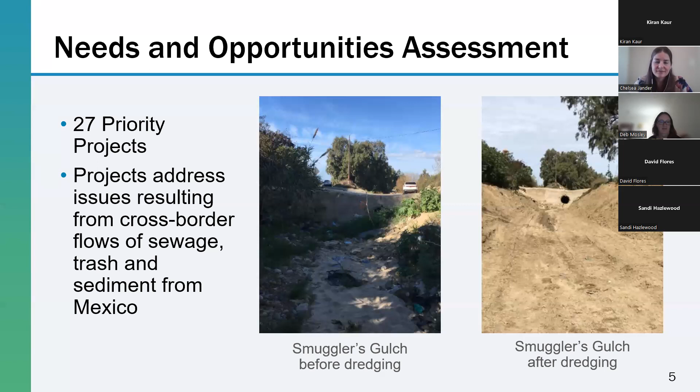Through that outreach, we identified 27 priority projects with a goal of accomplishing as many of the projects as possible in the future. Two of the projects we identified in the study, projects 10 and 11, have now been combined and are known as the Smuggler's Gulch Improvement Project. These projects address stormwater, sediment, and trash issues in Smuggler's Gulch through the addition of a sediment basin, replacement of an undersized culvert, and the addition of trash capture devices in the area. This project was prioritized as it was the only drainage area in the Tijuana River Valley that doesn't currently have any stormwater protection. As the supervisor mentioned, these projects are funded through a California State Coastal Conservancy grant for $10 million, which was awarded in May of 2021, and includes funding for the planning, design, permitting, and construction of the project. Next slide, please, Chelsea.

Great. Thank you so much, Kiran, for that overview. So now we're going to get into the details of the Gulch, including the existing conditions and then the project overview.

Presently, there are temporary efforts to address stormwater and sediment transport at Smuggler's Gulch, including the trash booms, which capture trash flowing through the Gulch, and dredging where sediment and non-floatable items are removed from the Gulch. Annual dredging costs vary, but are approximately $500,000 per year. These efforts are not sufficient as a long-term solution, given the high volume and velocity of stormwater flowing through the Gulch. The existing conditions also include an occasionally flooded Monument Road at the intersection of the Gulch and the road, as the vice chair had mentioned.

The goals of the project are to reduce trash and capture sediment on a much larger scale than we are currently able to do with those temporary measures. To achieve this goal, three primary project components were determined to meet those needs: a sedimentation basin, a new culvert under Monument Road, and trash capture infrastructure.

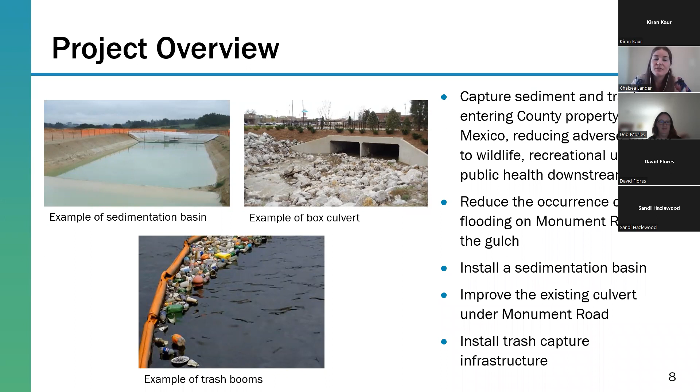The criteria includes environmental preservation, viewshed, groundwater depth, constructability, maintenance requirements, permitting, easement requirements, access, and cost. The criteria were developed to help create a balanced project that brings the greatest environmental benefits while meeting long-term operational and maintenance needs. An environmental analysis was completed in 2021, and environmental permitting is currently underway.

Locations both north and south of Monument Road were considered for the basin. The locations north of the road were deemed not feasible for several reasons. The area is within the FEMA Special Flood Hazard Area and Regulatory Floodway that prohibits encroachment. Also, the area is more susceptible to flood events that would actually wash away any captured storm sediment and trash.

Once we complete the study evaluation, we'll move on to the construction document phase with engineering and permitting of the project. We plan to complete that portion of the project spring 2023 before we move into procurement and construction.

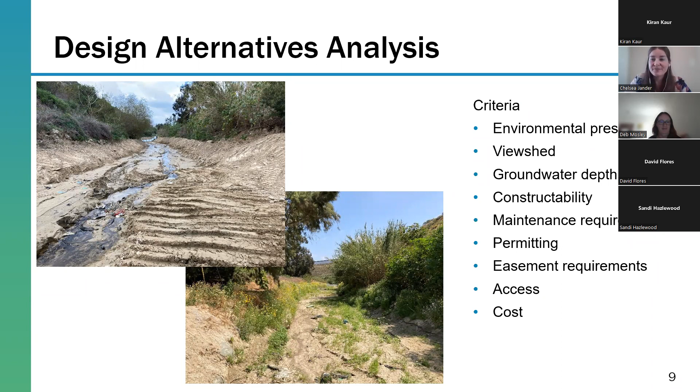There are two designs that we are considering for the sedimentation basin. These basins would be built on county land that is used for our current annual dredging efforts. An earlier concept had a basin that fit only within the main channel of the Gulch, which is on the left side of the basin seen on this slide.

After studying groundwater levels over the course of a year, we realized that the high level of groundwater would not allow us to create a basin within that footprint, as it wouldn't be deep enough to be effective. The footprint expanded to include where we currently stage for our annual dredging efforts.

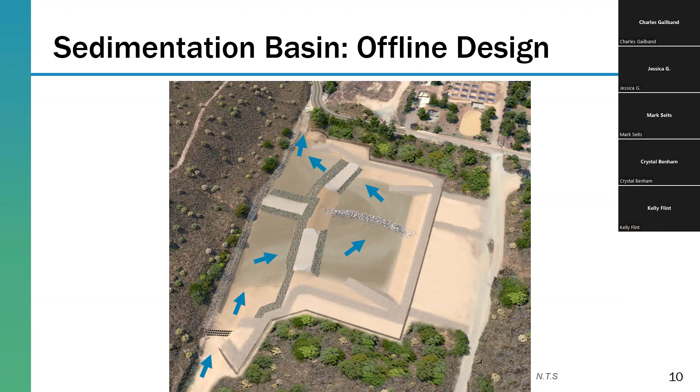Both alternatives that you'll see here and on the next slide would have H-pile posts. They're like large goalposts upstream of the basin to capture large non-floatable items. This design creates an offline basin that has a slightly smaller overall area, reducing the amount of concrete needed. Large storm events would push the water flowing directly down the Gulch, similar to how the water flows now. This alternative also has one less trash boom than the inline design, which we will look at next.

Here is the inline basin alternative. Water flows from the south and flows through the trash boom in the first basin before going into the second basin. In large storm events, similar to the other design, the water would flow along the bank of the Gulch, similar to existing. Both alternatives have nearly the same footprint and achieve substantially similar sedimentation capture results. The inline basin has two trash booms, which increases the opportunity to achieve our third project goal.

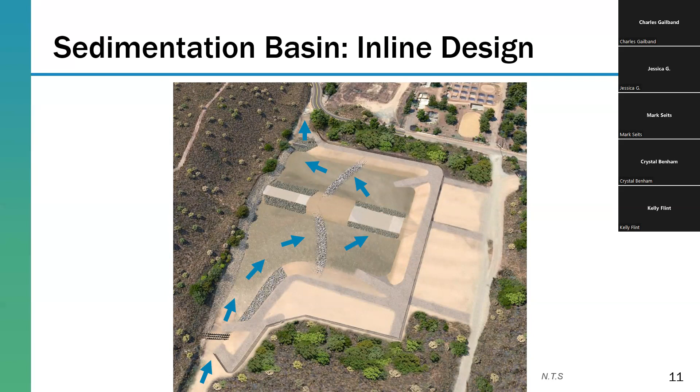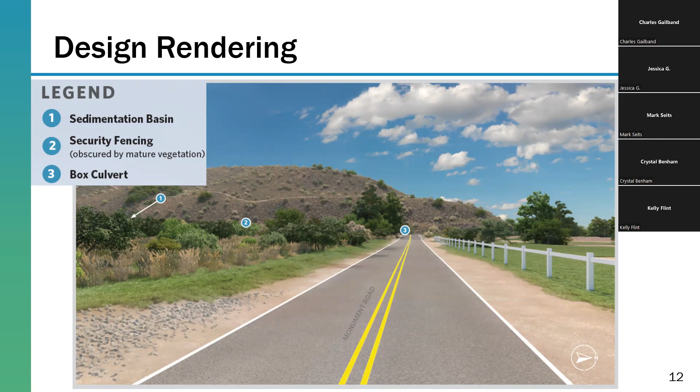We received a question on what the sedimentation basin may look like from the road. So we worked with our design team to provide a rendering. Here's what the sedimentation basin may look like from Monument Road. There's sufficient existing vegetation screening, however we plan to add additional vegetation as part of succession planning to ensure the area is screened for years to come. There are invasive species as well on site, so we will be treating those as part of the project, and we will be enhancing the vegetation to include native trees and plants.

Another part of the project is to address the flooding at Monument Road by increasing the size of the culvert that is under the road.

The project addresses the flooding issue by allowing the water to go through the larger culvert, and as a result, less flooding would occur in this area. The design replaces the existing culvert with minimal change to the road alignment. The new culvert would allow over 8 times the capacity of the existing culvert.

This brings us to the project timeline. We are working on our 30% design now. As the design progresses, we anticipate holding another public meeting this fall and completing final plans next spring 2023. This would set us up for construction to start summer 2023.

We're also working with the City of San Diego for all the necessary permitting, and this will track concurrently with our design phase.

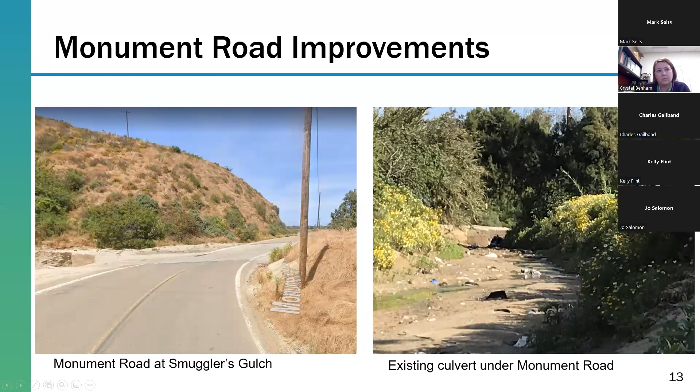We have a question from Mary. Mary is asking, how much of the existing canyon flora and fauna will remain after the sediment pond and truck pad is built? There's no other canyon habitat in the area to which existing species can move, as it is either a hillside or valley floor. This is a wonderful comment and question, and it's on the environmental side of things. So I want to see if Karen wants to assist with this.

So as you know, we're still in the early phases of design, and our goal is always going to be, especially for this project, to minimize disturbance to the flora and fauna in the Tijuana River Valley as a whole. Right now we're evaluating that and making sure we're maintaining and staying on the disturbed surfaces as much as possible. It's going to be ongoing as we move forward into design and flesh out those details, but we can probably get to that further at the next public meeting or check-in.

Sorry, I had my microphone off. Just another question while I have you here, Karen. When we look at the environment where we're building or making changes, if there are opportunities to plant new native vegetation for the area, is that something that's typically baked into the development plan?

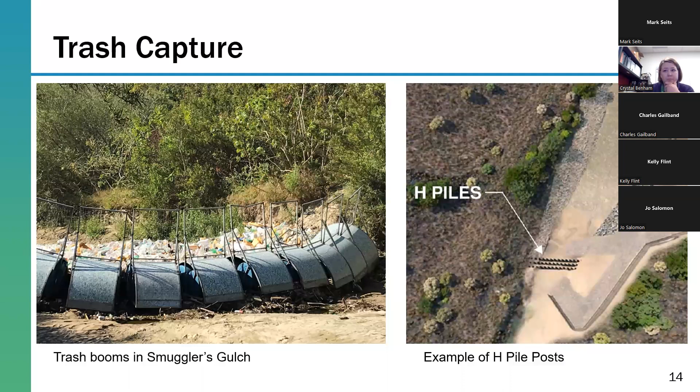Mary is asking about the city maintenance pad area across the street—she's saying it's already a severely disturbed habitat. Why not just widen the existing gulch there and use that as a sediment basin without a concrete base? That sounds like another wonderful development question that I'm going to hand over to Chelsea.

Unfortunately, it's in a FEMA special hazard floodway, so there are restrictions around it. Because of that, we're unable to consider it for the functionality of the sedimentation basin, especially because if that area floods, all of the sediment and trash we had captured would flow down further into the Tijuana River. That's what we're trying to avoid, which is why we looked at the more southern, upstream section for the location of the basin.

Thanks, Chelsea, for that explanation. We have a wonderful comment that came in here from David.